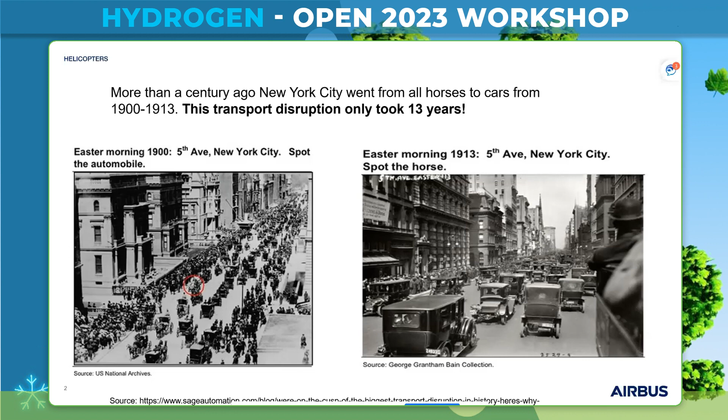Hydrogen is one of the key players. So just to show you how revolution in aeronautics can come very quickly: you see here on the left side New York City in the year 1900, and we had only horses. 13 years later, you see only cars. In 13 years, we moved completely from one means of transportation to another. The main reason for it was really the pollution generated by horses.

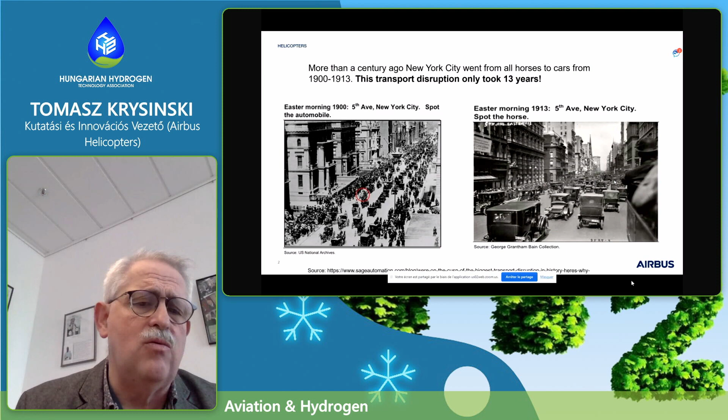And now we live in a period where everything that burns fuel generates pollution. So we are now, 100 years later, in a similar situation where we must find a new system, a new propulsion system with zero emissions. That is valid, of course, for cars, but also for aviation.

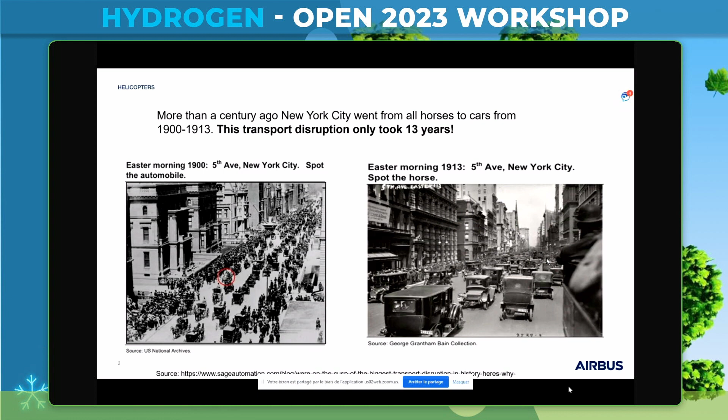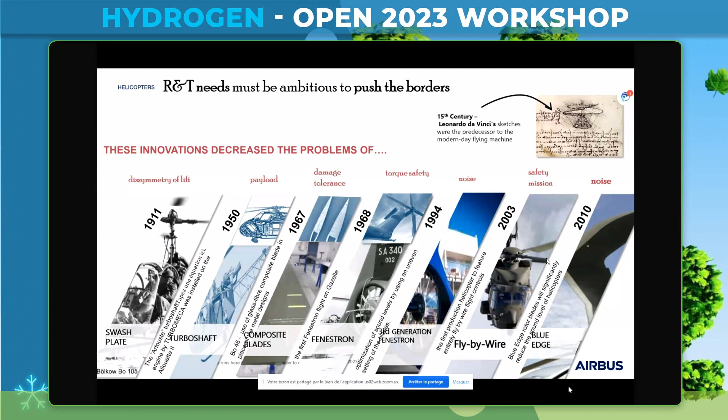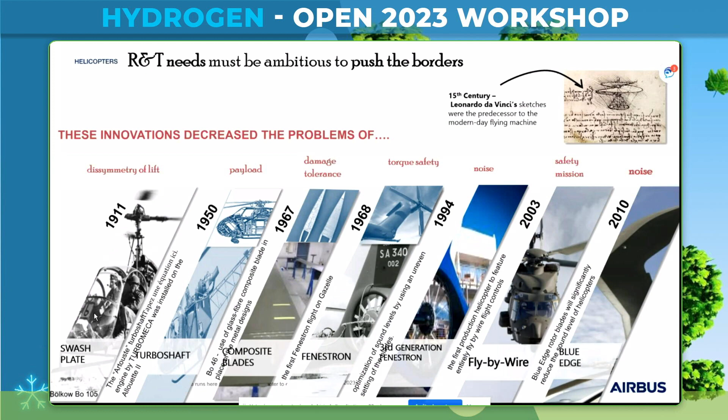Airbus Helicopters, we were always on top of innovation: first rotor with swash plate, first turbine to generate really useful load, first composite blades, Fenestron, which is still our company's signature for helicopters below 5 tons, fly-by-wire, which we are the only ones to use on the NH90. Our focus is also very important on noise, and we work very hard on it — the Blue Edge concept we use on the H160 is really the latest revolution we introduced in this area.

We have lived, I think, through 3 kinds of revolutionary aeronautics. The first one was in 1914, where fixed-wing aircraft found the market — the flight from Tampa to St. Petersburg in Florida, 23 minutes of flight, $400, which is $9,000 today. This was the first time the helicopter found the fixed wing found the market, because people were able to go very quickly — 23 minutes.

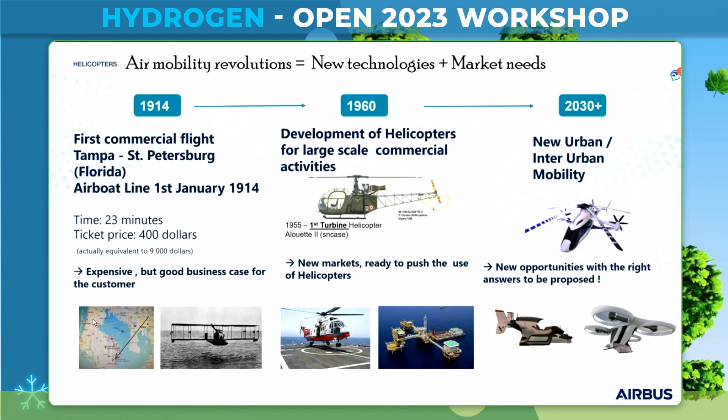If they traveled on ground, it would take a day. People playing stocks on the market or journalists found their business case paying this $400, which was a very significant amount of money, because it was the price of speed. The second revolution is roughly 1960, where we put the turbine on the helicopter, and this allowed really useful load on rotary wings. The third one is this revolution we live now with zero emission flight.

This is, I think, the way we can really show that every 50 years we live through a significant revolution in aviation. So Airbus Helicopters, we now have a very clear roadmap to address this revolution. We have the techno-bricks: touchless flight control, digital, cyber, connectivity, avionics — all the technology towards zero emission propulsion, vehicle aerodynamics, and eco technology for production.

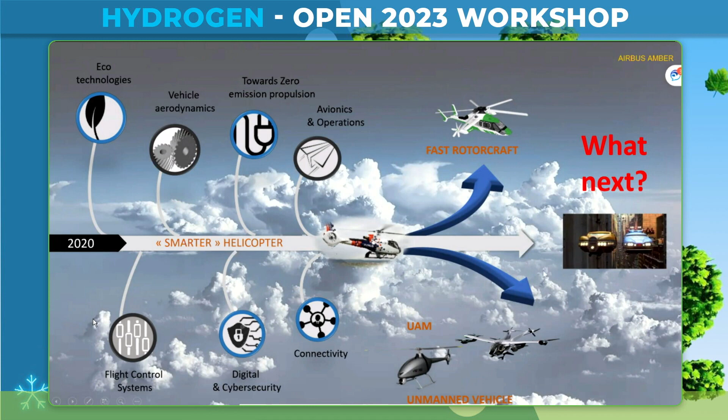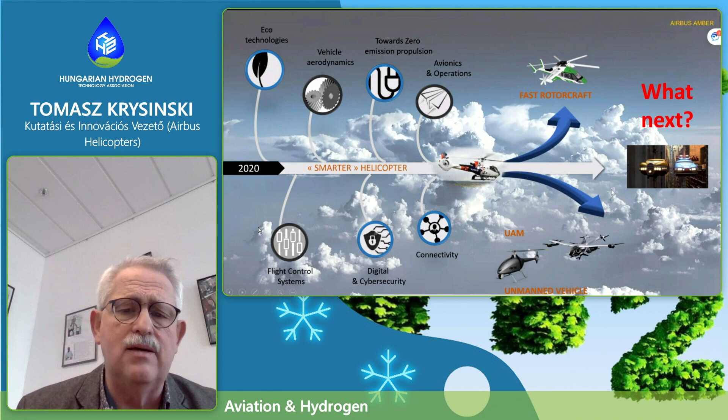What is in our DNA are the demonstrators, which you see here on the right, and we really love going quickly from the idea to real life. So we have the Flight Lab — you could see in the press that we have flown with the Disruptive Lab, with completely new technologies. We have the Racer, which will fly this year. We have the urban air mobility CityAirbus NextGen — we have already flown the first version. And we have the drone. So this is really our roadmap going to zero emission flight.

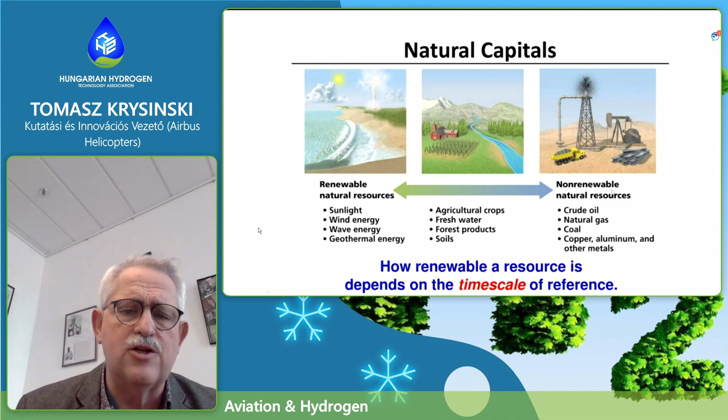So on nature, I will not dwell much on it, but clearly everything is really to protect future generations and not to use the resources and not to pollute. I think this is clearly the main target, and we have it in our DNA.

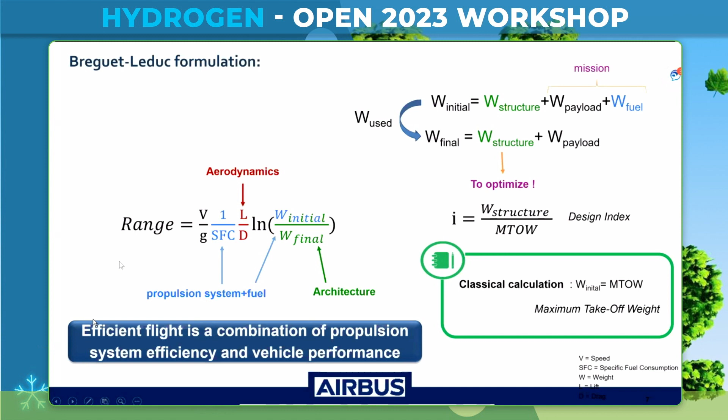The coefficient to penetrate in the air must be the lowest possible, and the efficiency of the propulsion system is key, where of course hydrogen will play the role.

So this is the roadmap. We go through for the zero emission flight. We work on the vehicle aerodynamics, which should bring from 10 to 15%. We are more in the region of 15%.

Turbine with new thermodynamic cycle should bring something from 15 to 25%. We also have what will be tested on the Racer, the eco mode. We can switch off one engine in flight and have the other one make our aircraft fly on one engine, and it's much more efficient to have one engine at full power than two engines at half power.

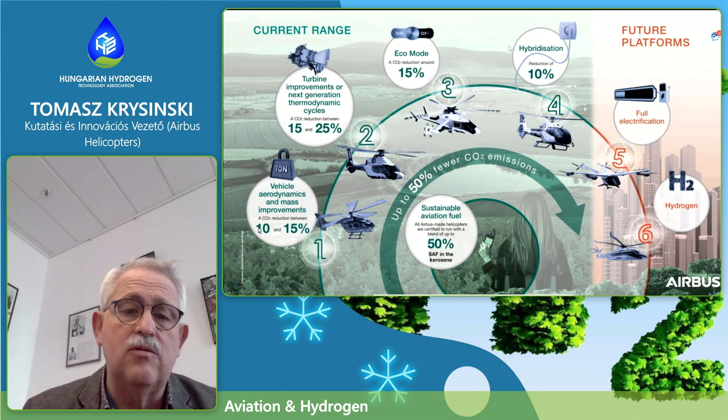Then hybridization will bring 10%. We can use, like in automobiles, batteries with electric motors, and we can charge the battery in flight in some conditions and use it back on the aircraft in other flight conditions, giving significant 10% fuel burn savings. All these techno bricks allow us to reduce fuel burn by 50%.

And it opens the doors to new energies. It could be SAF, sustainable aviation fuel, and of course hydrogen, I think, is the main target. Today we do share the hydrogen. Why hydrogen? Hydrogen is 3 times more energetic per kilogram than kerosene, but it takes 4 times more volume. So the key driver is really to reduce the energy we need for flight, and this will allow, in the second step, to go to hydrogen.

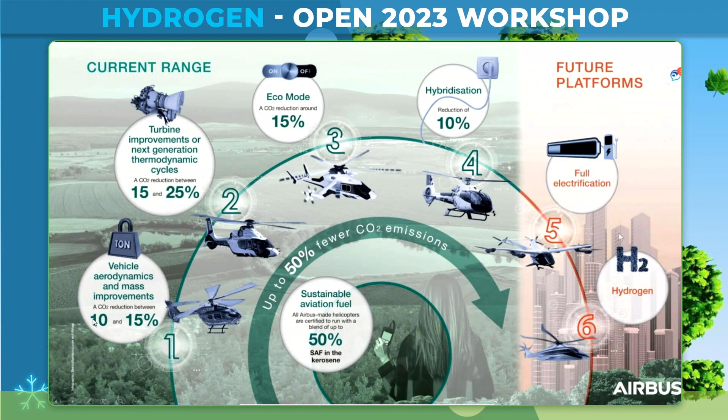This is the roadmap with concrete examples. We have flown with eco mode, what I was just explaining. We switch off one engine in flight and fly just at full power on one engine, a reduction of 15 to 25%. It can increase the range. It can reduce the fuel burn. We have tested

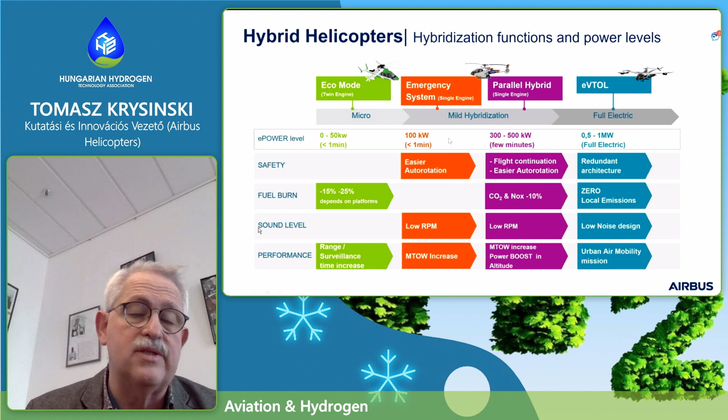an engine backup system on an Écureuil, a single engine helicopter, which allows strong improvement of the auto-rotation. We were the first to test it in flight in the world. This is the first hybrid propulsion used on a rotary wing.

Then we move very quickly. It will be mainly on the disruptive path toward power hybridization, where the power put on the aircraft will be bigger, and we must go for this. We currently started flights on the disruptive lab, and this will be one of the important breakthroughs of the disruptive lab. It will be hybrid propulsion, and of course, as a company, we decided to go to the zero emission flight.

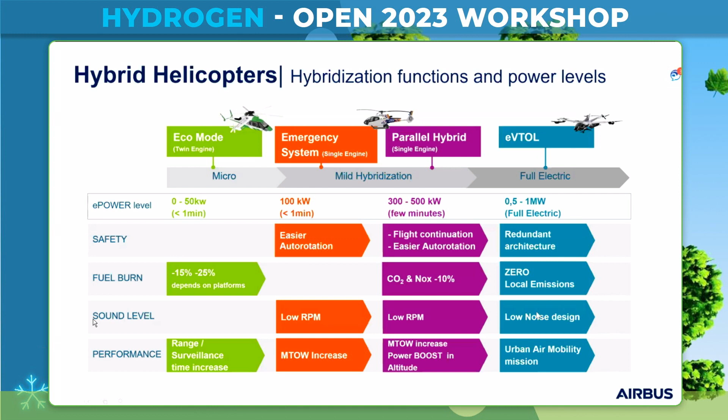We have significant activity on urban air mobility, CityAirbus new generation. We have already flown 2 aircraft. It's the learning period: CityAirbus Alpha and Vahana. And this is the way we progress also toward this fully 100% zero emission flight.

A few words about the Racer. To go quickly, we must have very small drag. We use the box wing. The box wing allows us to reduce the drag and also to put the landing gear in an appropriate position.

We have the pusher propellers, which are behind the wing. This pusher propeller allows us to reduce fuel burn by 10%, because the box wing plays the role of a stator, and the energy behind the propeller is much less energetic, so we save fuel burn.

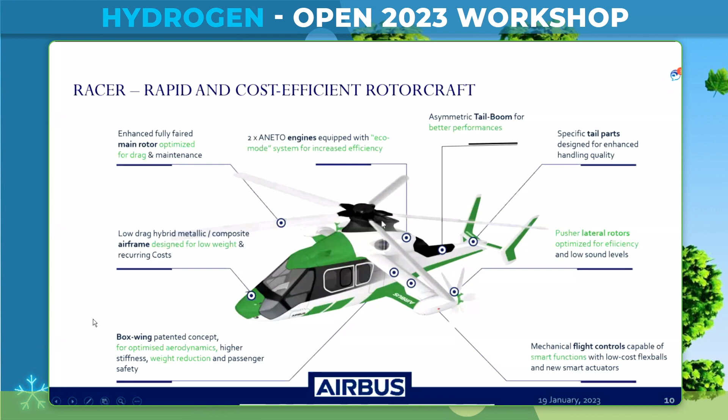And this aircraft is built in a way like a fixed wing, okay, very long and very low drag, roughly 45% compared to a normal helicopter. And the engine coolings are really very performant to reduce the drag of the aircraft. This is really what allows the rotary wing to go to 220 knots, more than 400 kilometers per hour, in an affordable way.

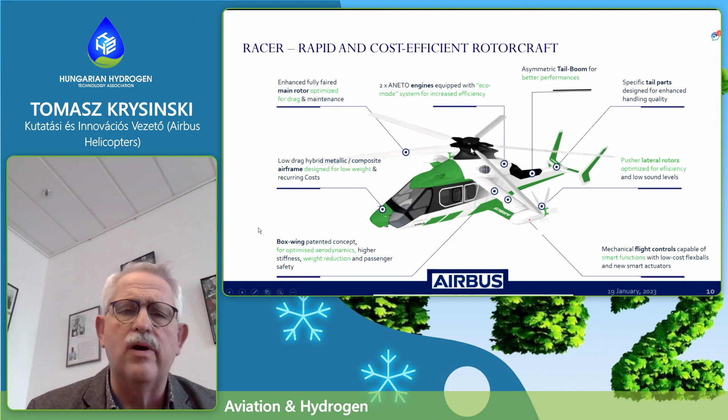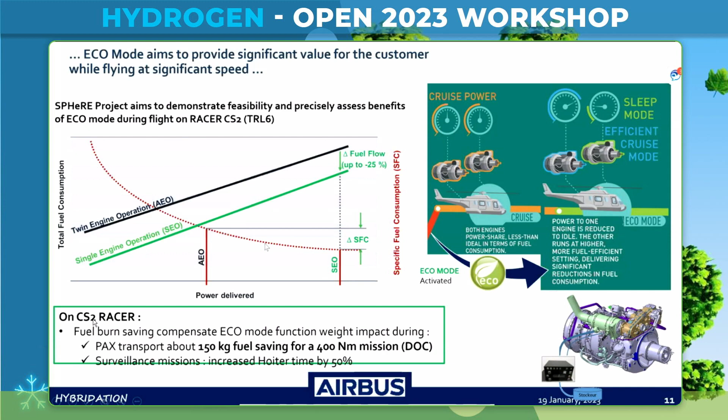So this is how single engine operation works. We have total fuel consumption here, and the power. This is the curve showing the fuel burn as a function of power. The more power we take, the less specific fuel burn we have. So if we have two turbines working at half power, it's much better to have one working at full power,

because it will generate up to 25% less fuel burn, and this gives us 150 kilograms of fuel savings for 400 nautical miles. So it's a very, very important item. We can get 2 more passengers on the civil market, and of course much more capability on the military one.

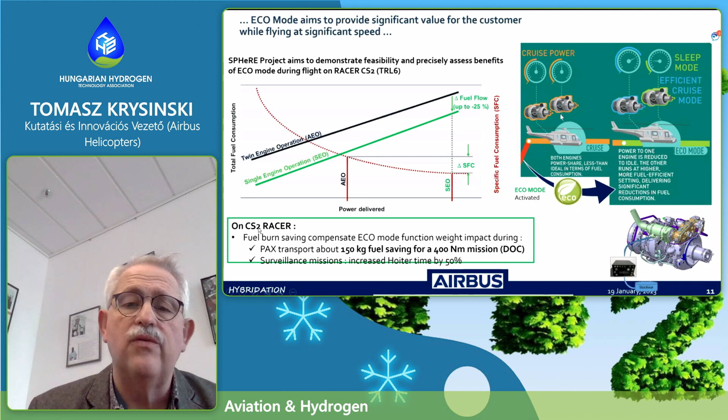This is a very interesting principle, using the high voltage start and stop system, because we must restart the turbine only when it is really necessary. For this we use the high voltage start and stop system.

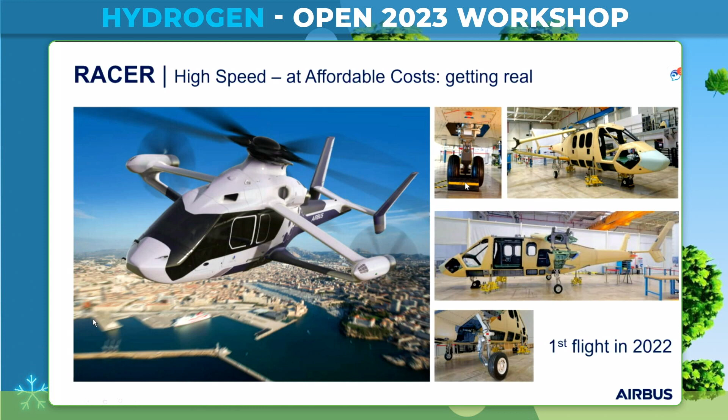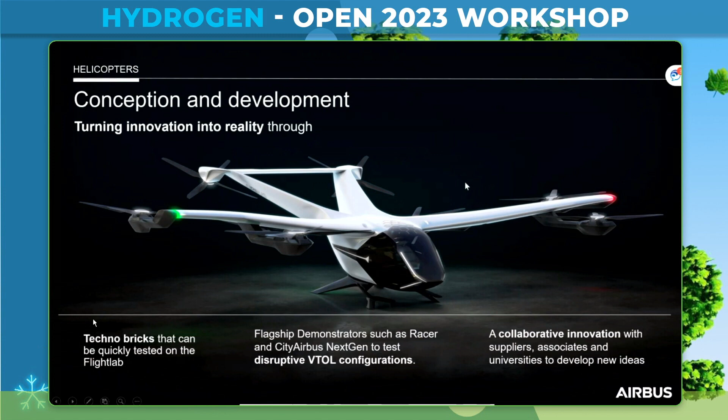A few words about the CityAirbus NextGen. We have 8 propellers. There are, I think, 200 companies all over the world trying to do UAM. Our approach is based on simple propellers with no variable pitch, just variable RPM, because it's much simpler.

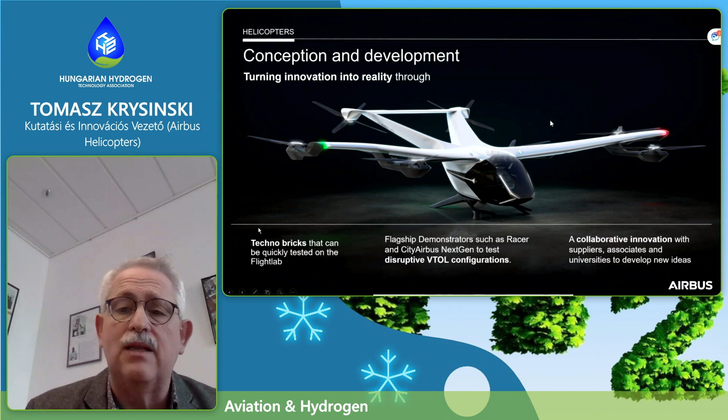Our approach is simplicity, and simplicity is basic. Aeronautics does not like complexity.

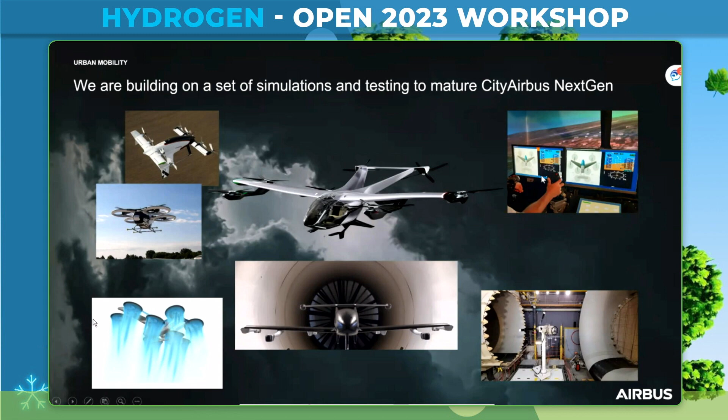We also have a very progressive approach. We already tested the CityAirbus Alpha, we tested Vahana, we did a lot of wind tunnel tests and theoretical simulation. We tested the propellers in the wind tunnel, as you can see here, and we worked very hard in the simulator to check all the failure conditions. It's really a very methodical approach for the UAM, which is difficult for startups to do, but this is the added value we can generate: the methodology to develop this kind of rotary wing aircraft.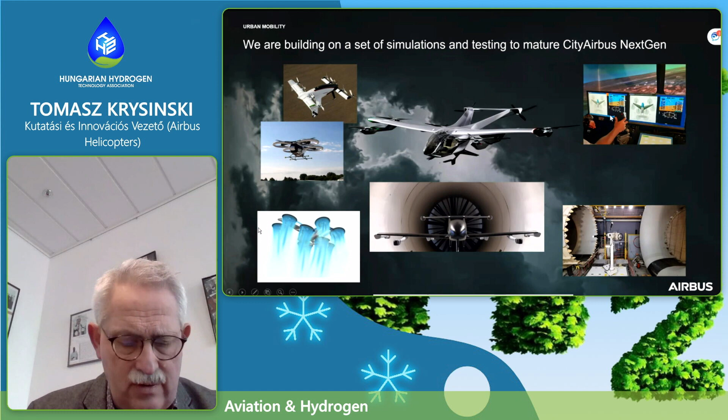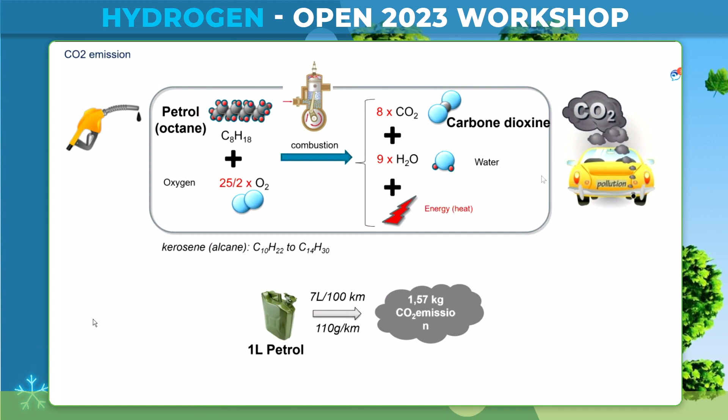A few words on why we fight so much for fuel burn reduction. One liter of petrol generates 1.6 kilograms of CO2, due to the chemical reaction, and the oxygen is very heavy. The problem with CO2 is that once emitted, it stays 1,000 years in the atmosphere, so it's an integral of everything that was done. A reduction is key, because once emitted, it stays forever.

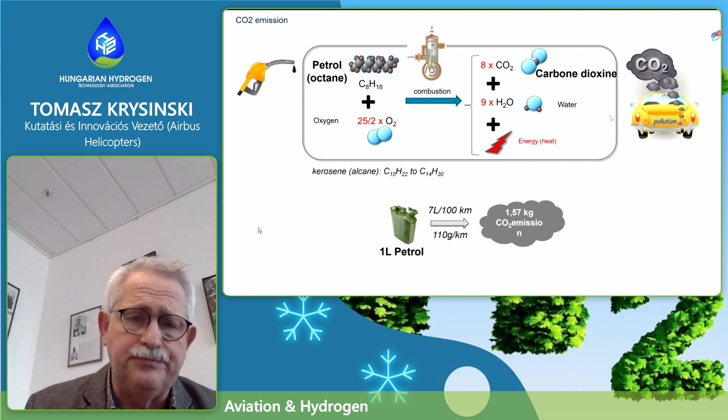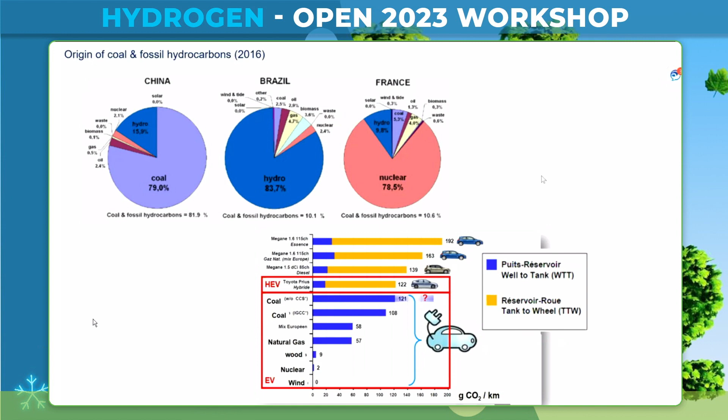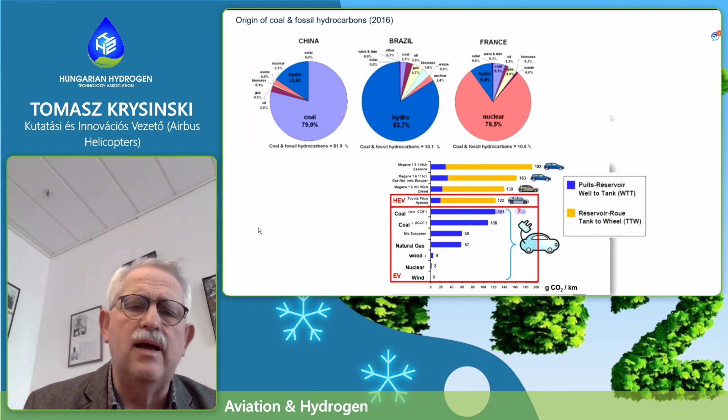Also important: we will always speak about energy. This example is for the car, but it's exactly the same for aeronautics. It depends how the electric energy is produced. If it's produced from coal, it's even worse than burning kerosene. So when you speak about energy sources and energy production, it's very important to keep in mind how the electric energy is produced.

Just to show you the difficulty: if we make a fully electric flight, 1 liter of petrol is roughly the same energy as 27 kilograms of lithium battery. So you can imagine it's not at all the same weight — much, much heavier. For a car, if you'd like to have the same range as a simple 1-ton car running on 50 liters of petrol, which makes 500 to more than 500 kilowatt hours, you would need 2.6 tons of battery. So you can imagine why electric cars don't carry that much battery.

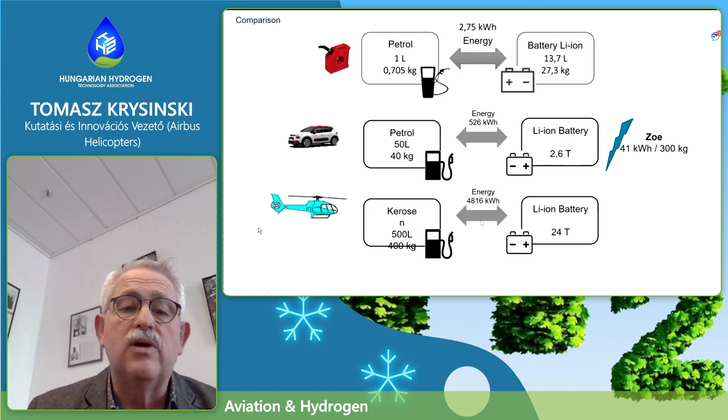For helicopters, it's even more severe. Take a simple one weighing 2 tons — to have the same range, we would need 24 tons of battery. This shows once again that electric flight is really for shorter range, and the situation is much more challenging than in automobiles.

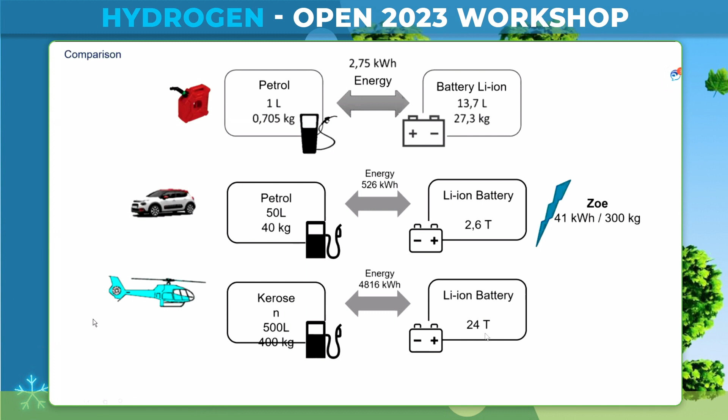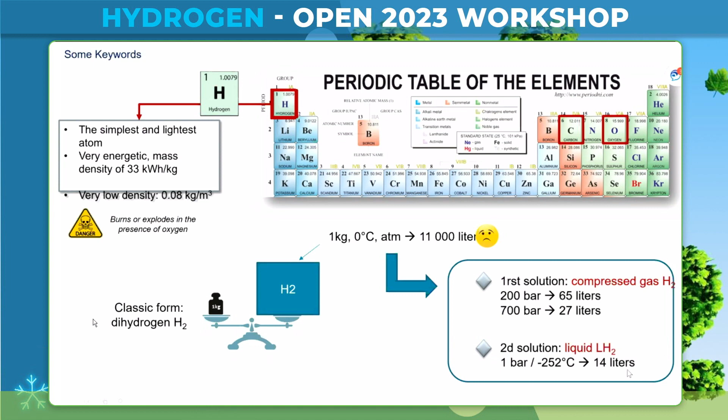Now let's switch a bit to hydrogen — the lightest element in the Mendeleev table, top left. I'll remind you of a few facts: 1 kilogram of hydrogen is 11,000 liters at 1 atmosphere. Compressed at 200 bar, it's 65 liters. At 700 bar, it's 27 liters. For aeronautics it must be liquid — at minus 250 degrees, it's 14 liters. So it's 3 times more energetic, but it takes much more volume.

So the first idea and first target is really to reduce the energy unit of flight. For rotary wing applications, this will be everything related to urban mobility, and for fixed wing, it's the regional aircraft, where range is not so important.

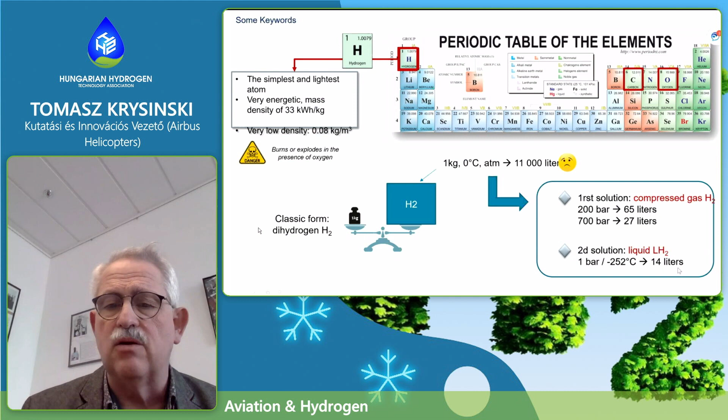Over the ocean, when the range is very, very high, the main application will be sustainable aviation fuels, because hydrogen will be too voluminous.

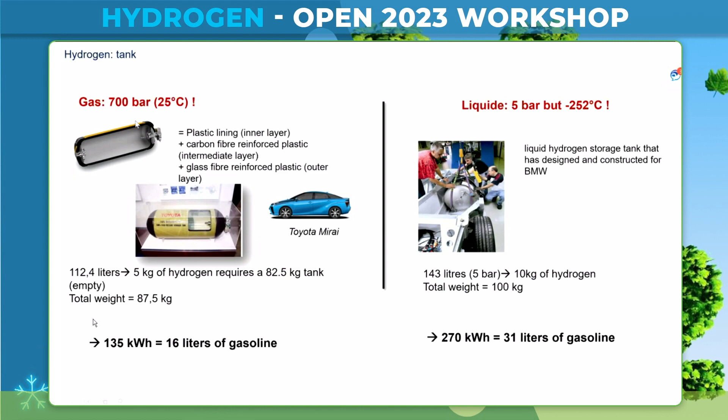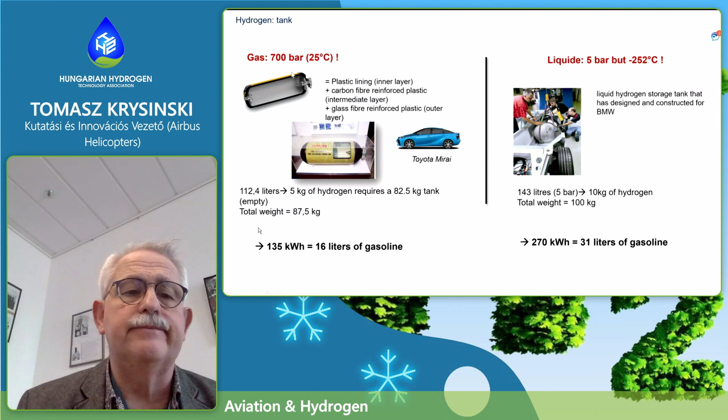A few words about hydrogen. The mass of hydrogen is one thing, but you also need the tank around it, and if you store it, it is very heavy. For a few kilograms of hydrogen, we need a very heavy tank. For 5 kilograms of hydrogen, the total weight becomes 87 kilograms. So hydrogen is one thing, but where you store it matters, because storing it at 700 bars requires a carbon reservoir, which is quite difficult to produce and quite heavy. So when you speak about hydrogen, you should always keep in mind the weight of where it is stored.

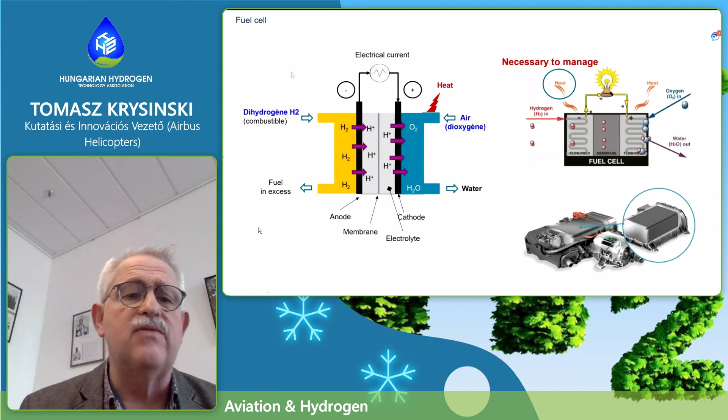Fuel cell is something we always have in mind. Fuel cell works in the opposite way to electrolysis. In electrolysis, we supply current to the water and generate hydrogen. The fuel cell is vice versa. We have a membrane in the fuel cell. We supply hydrogen from one side, air from the other side. The protons go through the membrane, electrons go outside, and then we generate electricity. This electricity we send to electric motors, which generates the torque.

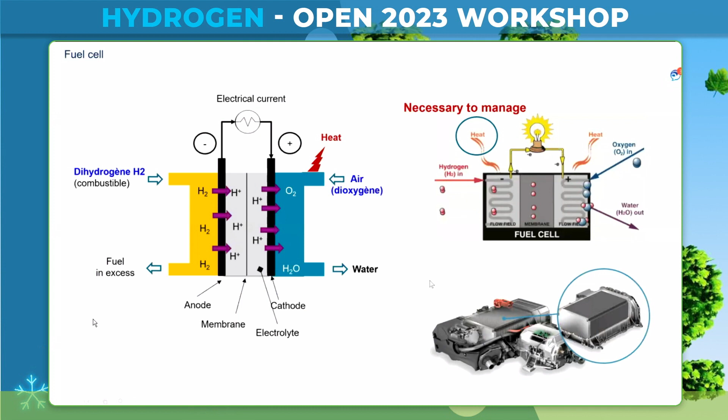The efficiency of the fuel cell is 50%, and we must cool the other 50% of thermal energy. So one important item of the fuel cell is the cooling system. Everybody should keep this in mind. The big challenge is having an efficient exchanger to remove the heat that comes from the fuel cell.

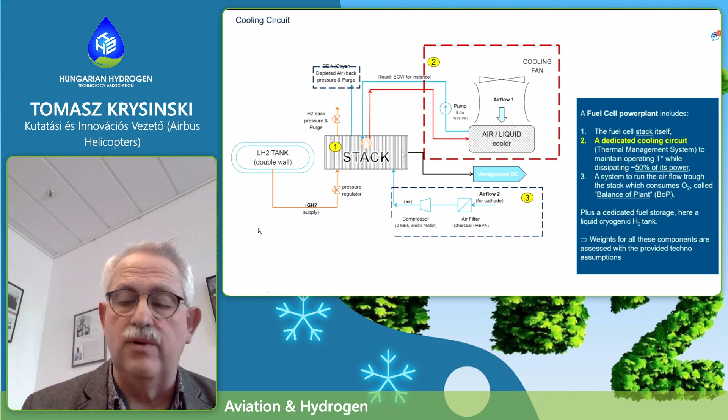Once again, consider the volume of the kerosene tank from the A320. Clearly, for the range, we should have a lower number of passengers because the volume of the tank will be bigger. So the target is clearly to aim for regional aircraft in the first step.

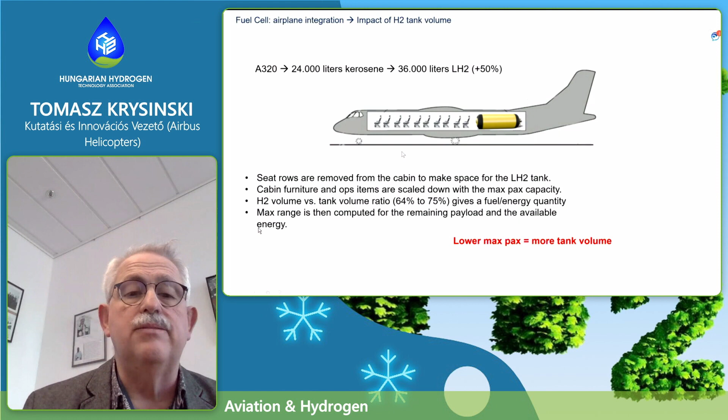One important item of hydrogen is the way it is produced. The worldwide production of hydrogen is really done from gas, coal, or crude oil. Electrolysis, which is the clean method, is just 4 or 5%. So we must really move forward. One is to make the aircraft compatible with hydrogen, but we must also have the ecosystem to produce it, because actually only 5% comes from electrolysis.

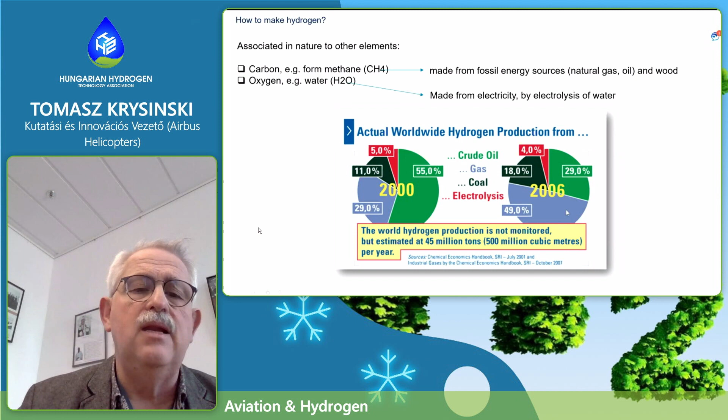A lot of companies spend a lot of money to produce clean hydrogen. I think billions of euros have been spent by Linde and Air Liquide to really produce green hydrogen, and it is a very important target.

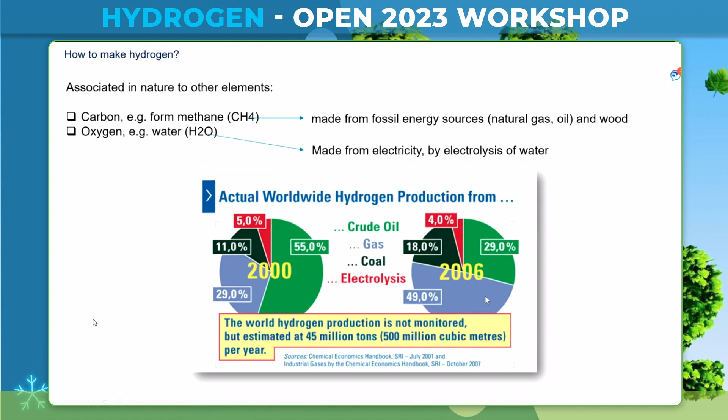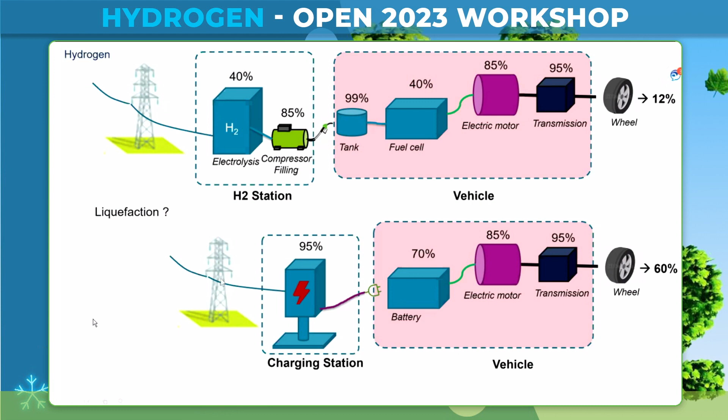Also, as is done in the car industry: we have electricity produced, and from electricity we produce hydrogen, compress it, put it in the tank, have the fuel cell, and then electric motor transmission.

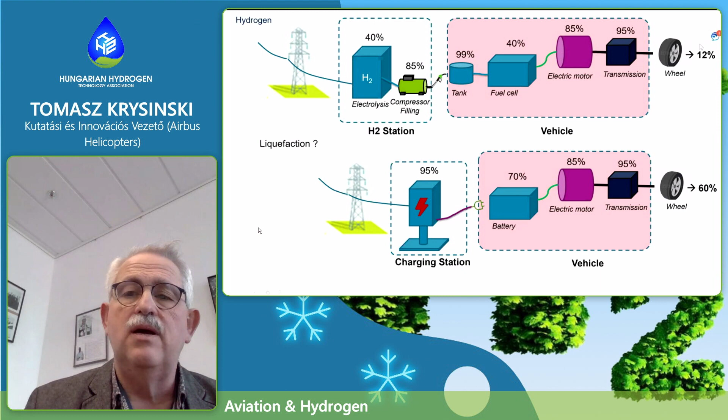Sorry to interrupt you, Mr. Krysinski, we are 8 minutes over time. Could you just wrap up a bit? It's my conclusion, just the conclusion.

We are very happy that this is the last slide, and Airbus really sparked the revolution of hydrogen, and somebody must do it first. So we are very proud to be the company who really initiated this idea. That's all from me.

I am happy to respond to a few questions. Since we heavily ran out of time, I think for now just one question from the audience, and if there are more questions, we would transfer them to you by email, and you could answer them.

If you have one question from the audience for Mr. Krysinski from Airbus Helicopters, then we are ready to hear it. If not, no problem, we will transfer it by email to him, and he will answer it duly.